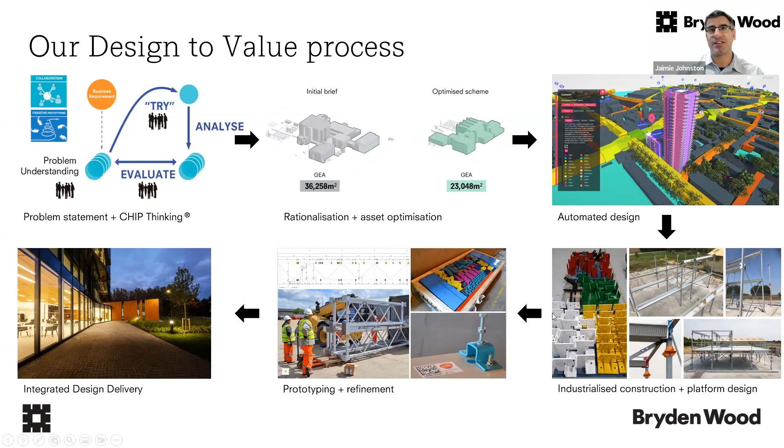So last week we talked about this kind of front end process. This week we're going to talk about these two bits, particularly automated design and industrialized construction. So this was the broad project life cycle we've talked about.

Data analytics, CHIP thinking we talked about. Reference design is where, for a lot of our serial clients now, what they want is a centralized, optimized design for a particular asset, be that data center, hospital, and then a way of adapting it and localizing it for specific sites and particular geographies. So that's a process we've been doing for quite a long time now.

Maria and her team have been working out how to really refine that process and start to dramatically increase the speed with which we can do that, and even open up wider the potential solution space that we're looking at.

So one of the things that hopefully came across last week is the process of CHIP thinking, particularly in the way that we aggregate business intelligence, the way that we aggregate knowledge from stakeholders and put it together, is increasingly giving us a data set to work with.

And lots of clients now have reams of data, but the gap between data versus information versus insight - there's a few steps there that people often find difficult to hurdle. So we've been increasingly working out how to leverage clients' data and do things with it to speed up the design process.

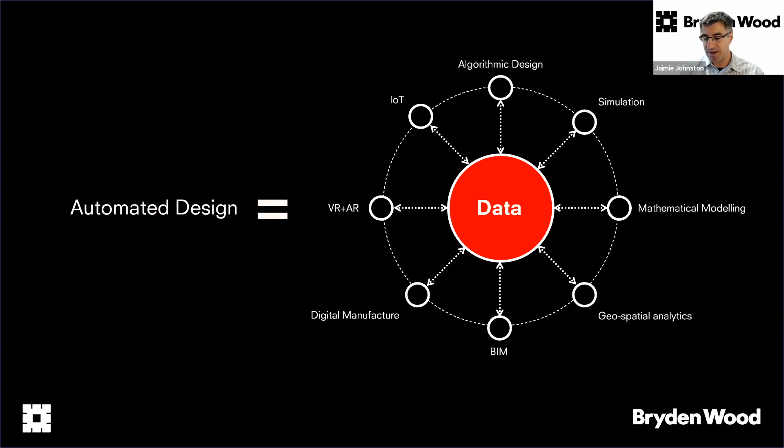So in our design to value space, one thing you could do is just automate a traditional design workflow and be much quicker. And for sure, that might be helpful.

Anyone who was tuned in last week will know that through design to value, we're not just looking to do things quicker, we're looking to do things better. So we'll actually use the speed from these automated workflows to test more ideas, consider more things, do more simulations. We're now using that speed not just to be faster, but also to find better, more highly targeted solutions.

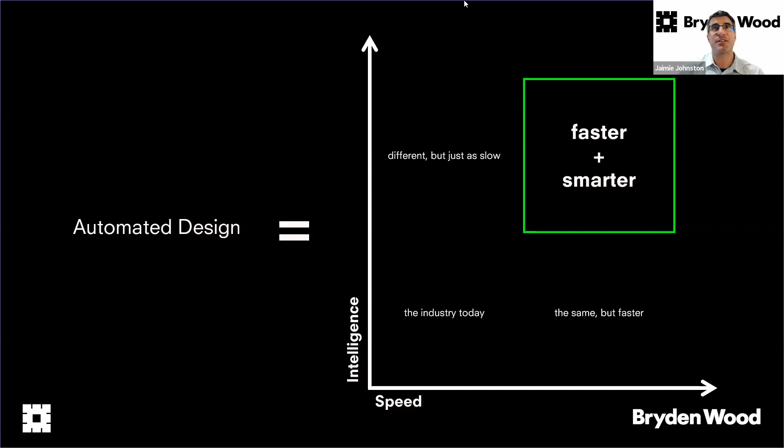So I'm going to hand over to Maria now, who's going to talk through what that really means for the creative tech team, how that team's evolved, and some of the best practice we've been starting to develop. So if I stop sharing now and hand over to you, Maria.

Thank you, Jaimie. So before I talk about the ways that we apply automation, I would like to introduce our team. In Creative Technologies team, our focus is on how we can apply automation in the industry, how we are interested in technologies, and we want to explore the capabilities that the technologies can offer.

We use the power of data, and we deliver software to our clients, but we are not software developers. So who we are: a group of architects and engineers, all specialized in different technologies. We are curious people that use our creativity on shaping the data, and we explore how the technology can make a meaningful impact in our industry.

So we developed, we structured our team throughout the years in a very careful way. And actually, as we increased as a team, we all had the voice and we shaped our team and our qualities together. And this is why - so we started back in 2017.

And in the 5 years that we exist as a team, only by year 4 did we manage to hire a software engineer.

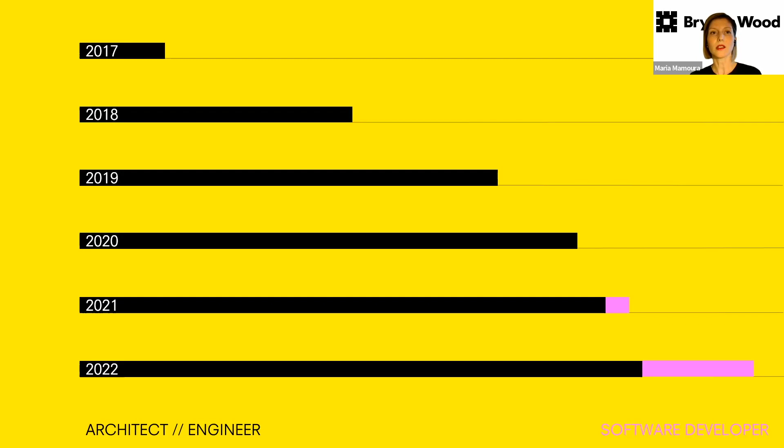Before we hired a person with a completely different background to us, we wanted to make sure we explore in a very critical way the technologies we want to use in our processes, the technologies that would help deliver the products we want to our clients. This is how we now have 5 software developers integrated in our team.

Across all projects and the whole team, we create clusters of people with different backgrounds, so software developers don't work on their own. We create different groups depending on project needs or our interest in different technologies, keeping a diverse shape across the team. We believe when we have many different voices coming from different cultures and backgrounds, this is the way to raise constructive discussions and debates, because we always need to question ourselves about which technologies to use and the best way to use them to deliver the right product.

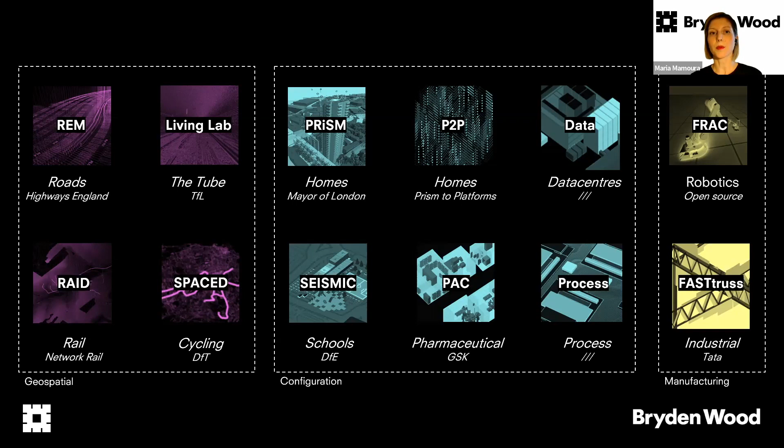As a team we've worked across many different digital projects - digital workflows, web applications, different configurators. Some of those focus on how to use geospatial information mainly. In other cases we develop platforms that allow us to explore different configurations of buildings, such as data centers, homes or schools. We also focus on projects that let us explore how to automate construction and apply design for manufacturing.

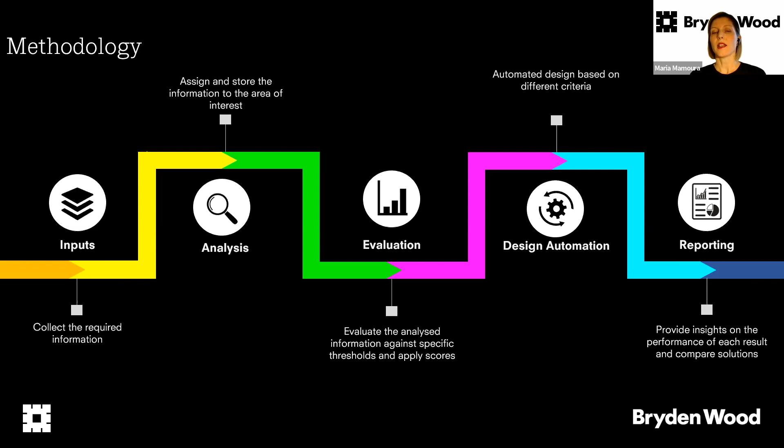Across all the different projects we work on as a team, we apply one common methodology in principle. The most challenging part of this methodology is how we can understand the needs of our clients and get the right context, translating it into a machine readable format.

It is very important that at any stage of any project we work on, we have constant communication with our clients, building a collaboration where we create a common vocabulary between the client and our team. We also translate the information we have in the right way so we can take it through the technologies we use.

It's very important for us that whatever we do in our processes, however we translate this information into a data set, we bring it back to a human readable format, and bring back the evidence of what we analyzed and what we developed as a team. Again, it's very important to have our clients engaged across the whole process of our work.

We want constant feedback from them, because whatever we do in between - which is the creative part for ourselves, where we test our methodologies, connect all the different technologies, and explore all the information we have - if we don't bring it back in the right format, then we'll just remain a black box for ourselves.

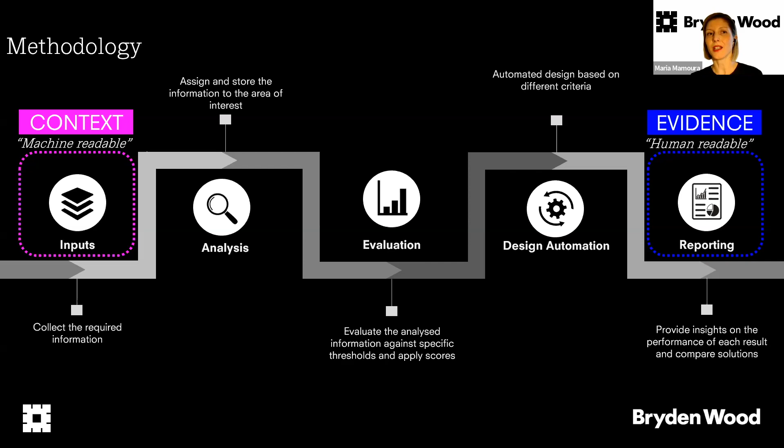So I would like to share with you a couple of projects that we developed as a team, by taking you through the journey of our team throughout the years.

As a team we've grown in confidence over the years. This started also when I joined Bryden Wood, when we weren't really aware of the capabilities we had back then and the impact we would have in the industry. But by having the right clients on the right side and grabbing the opportunities we had, we were quite ambitious and pushed our boundaries as a team, trying things we never used before in order to create a much more structured and confident team.

But we still have this curiosity, always asking ourselves: okay, how can we change the things we have already made, and what comes next for this industry?

In the first phase, which we call innocence, in terms of technologies we used whatever we had available back then. We used software familiar to architects and engineers, available add-ons to help us deliver what we wanted, and we were sharing data through file sharing.

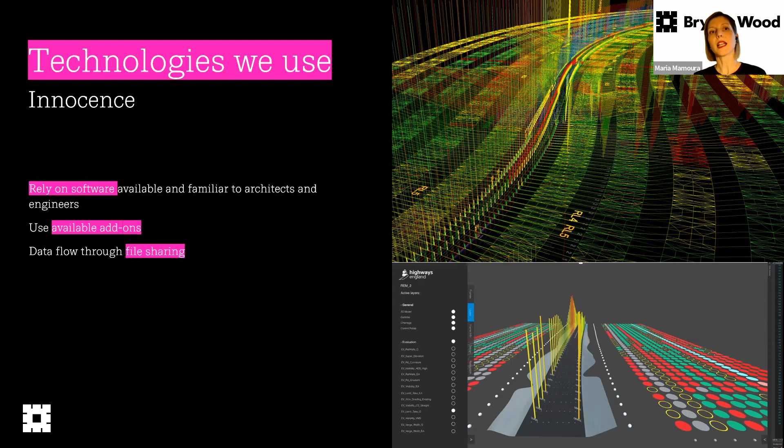I'd like to explain this process through the very first project we got as a team, the Rapid Engineering Model by National Highways. It's worth mentioning that the first requirement from National Highways was to create a BIM library with standardized components that they would use in construction.

That was a relatively easy task for us, because at Bryden Wood we always cared about how to standardize not only the process but also the assets. But we quickly identified that if we focused only on this part, we wouldn't radically change how the industry works, because National Highways also had the vision to innovate the way they work and change the workflows they use.

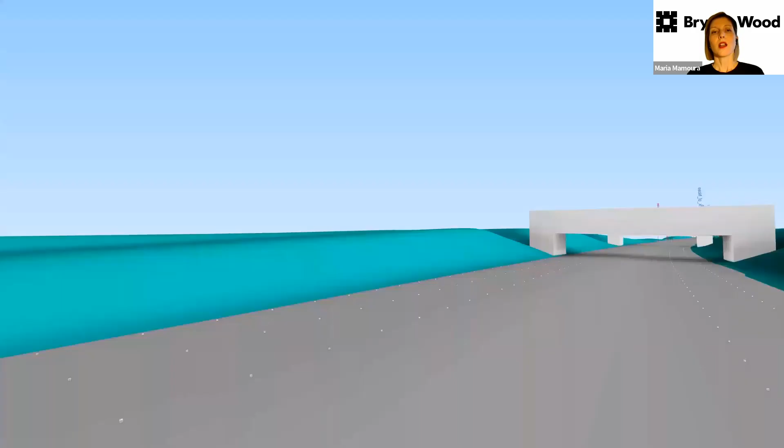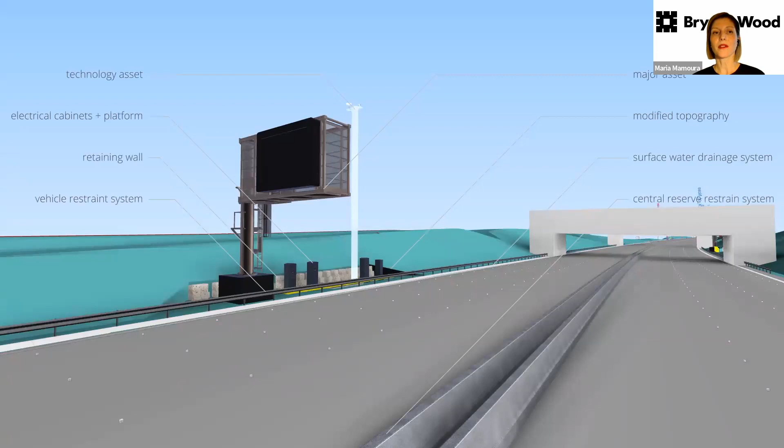We weren't that innocent back then to suggest a very big scope. We tried to identify small case studies from the very beginning of the design process, just to prove to our client that if we change a few things early in the design process, it could have a huge impact at the later stage of construction.

Through this collaboration, by proving what we had in mind and the impact it would have on the way they work, we created confidence between ourselves. So we managed to get a much bigger scope, where we were asked to create an automated workflow that would place all the assets required across the whole network of the country. This is what you see on your screen.

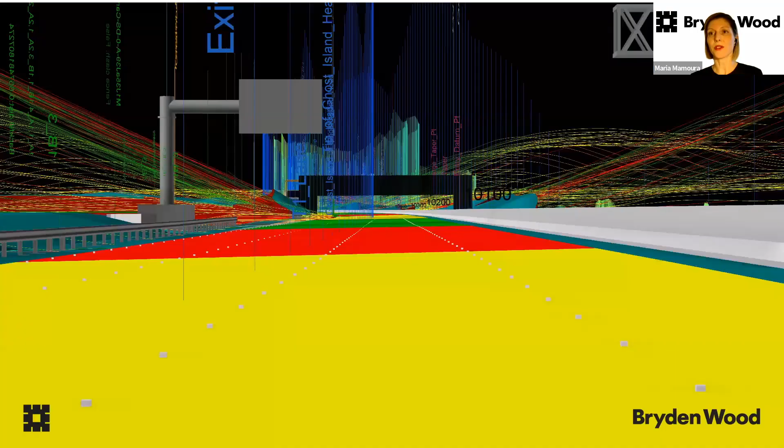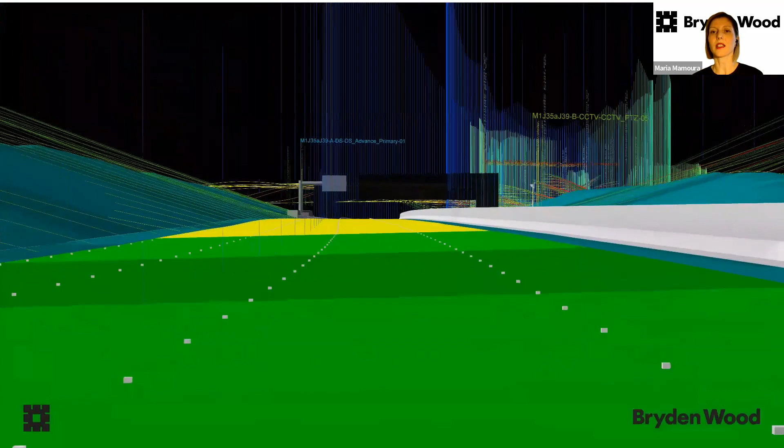Our focus was how we can translate the design guides we collect and the experience we got from the engineers involved in designing highways, and convert this information into a data set. We had to deal with lots of information, and we tried to depict that in different graphs to give back to the engineers and users of this workflow the conditions of the road they had to deliver a specific design for, in order to enhance their decision process.

It's worth mentioning an example about visibility conditions. First of all, as a team we aren't responsible for designing highways, and the experience those people have is incredible and super valuable. But what we did is provide them a tool with all the information they need available across the design stages.

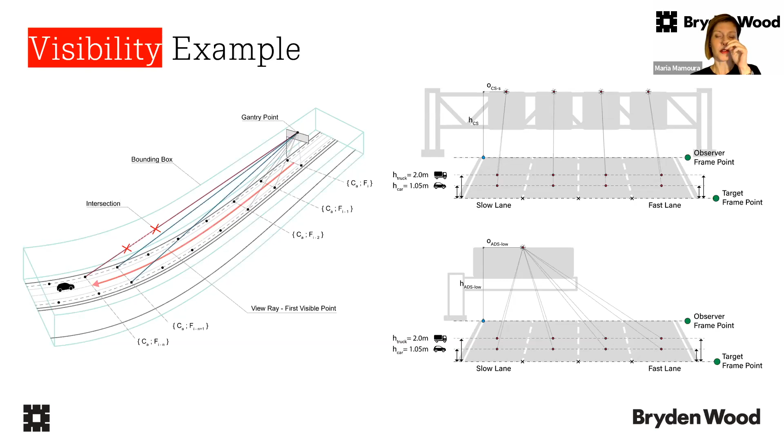For example, we could provide across the whole network, and at any location on the roads, through running many algorithmic processes, the visibility conditions of many different assets. That was a huge set of information, and our engineers using the workflow realized that having this information much more in advance in the design process could help them make much better decisions.

As we gained more experience as a team, we worked towards the phase of ambition, which was the more playful phase. In this case, we didn't rely on just the software we had available, but created platforms. We used available platforms and started customized processes to deliver platforms, tools, and applications for different users.

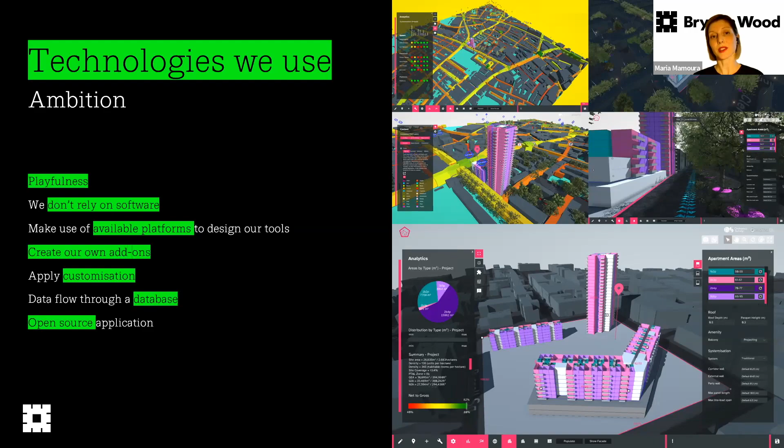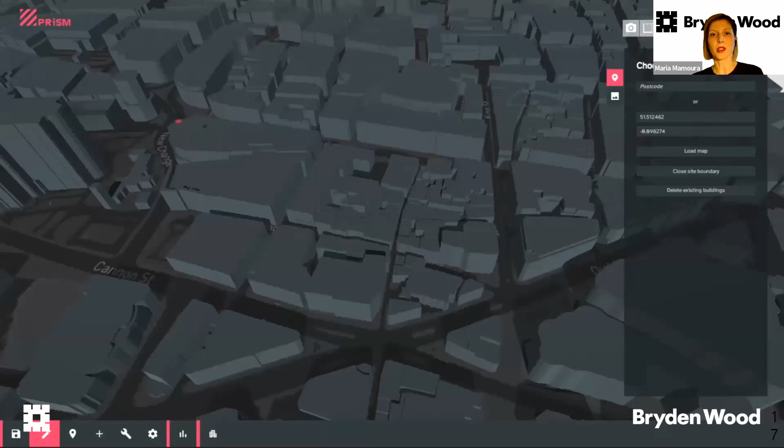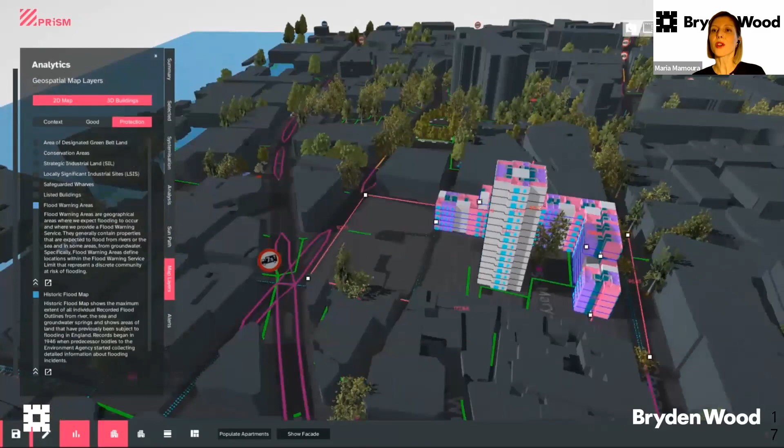An example of that is the Prism App project, delivered to the Mayor of London. What we wanted to do was create a platform that any architect, user, or developer could access. It's an open source platform through which we can explore feasibility studies across the City of London, where we capture all the local design guides, connected to a list of components based on a specific methodology for design for manufacturing, meaning we can explore what we can build on specific sites.

We can explore the data and information for the area, accessing information about green spaces, traffic, or bus stations. But more importantly, we can directly see the live report of the performance of the buildings, the list of components we'd need to build them, and any information to evaluate whether what we design is what we want to achieve, or how we can make our design better.

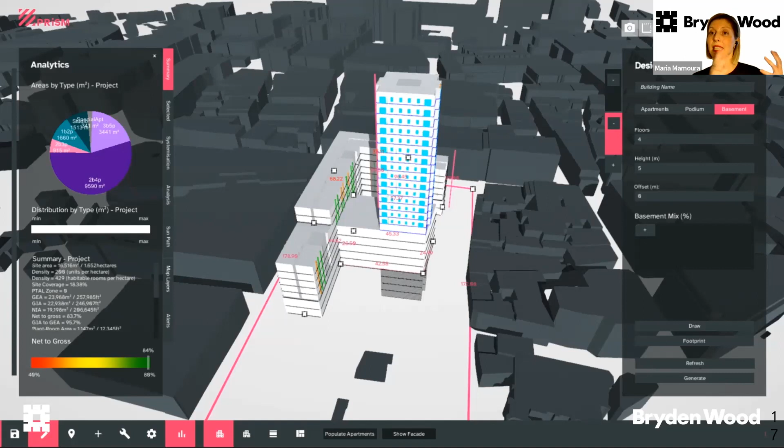It's worth mentioning that the rapid engineering model is an ongoing project, and through this phase we also challenged the way we initially structured the project. By gaining more knowledge from the PRISM app, we transferred this knowledge to other projects we worked on. It's very important for us to constantly challenge our past work. We don't want to reinvent the wheel, and we want to reuse the innovation applied in previous projects.

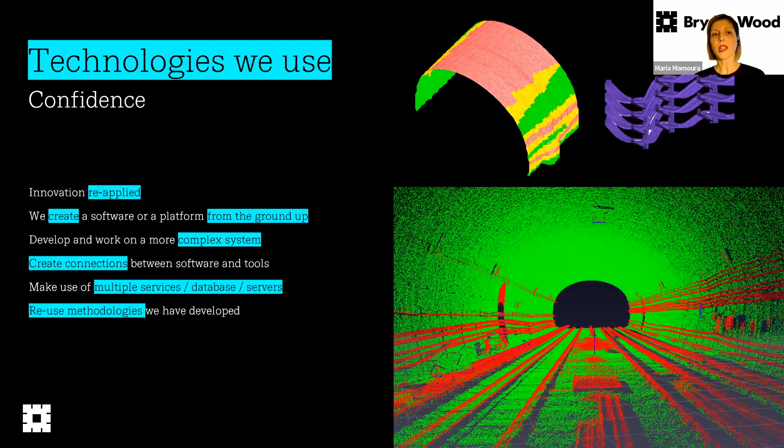And that takes us to where we are today, in what we could call the phase of confidence, where we create much more complex systems. We create connections between software and tools that allow us to apply much more complex algorithmic processes, analyze and run millions of iterations of design options, using multiple services, databases, and servers.

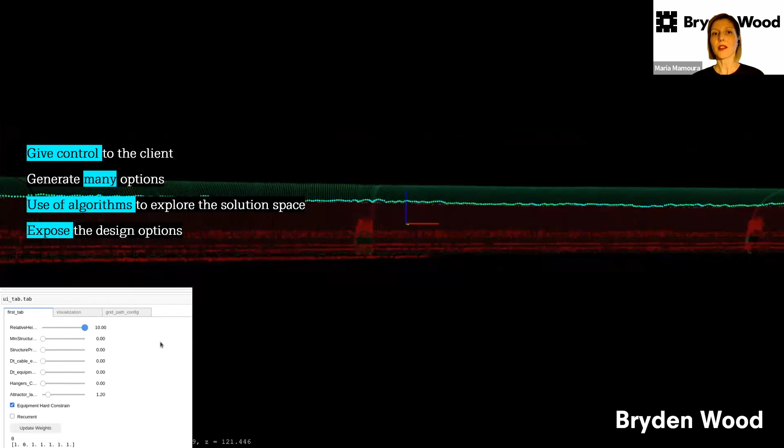So through that way, what we can give today is control to our clients, and we can expose the design solution space that we create. It's very important that by building communication with our clients, we provide the tool so they're able to explore their design solutions and improve the design on their own.

It's worth mentioning that what we don't want to create as a team is a black box again. We want to expose the process, expose the risks and challenges for any design option. We want to make our clients part of the design process. Automation wouldn't give one final solution, but it will give us the direction to improve the products we want to deliver.

I will hand over back to you, Jaimie.

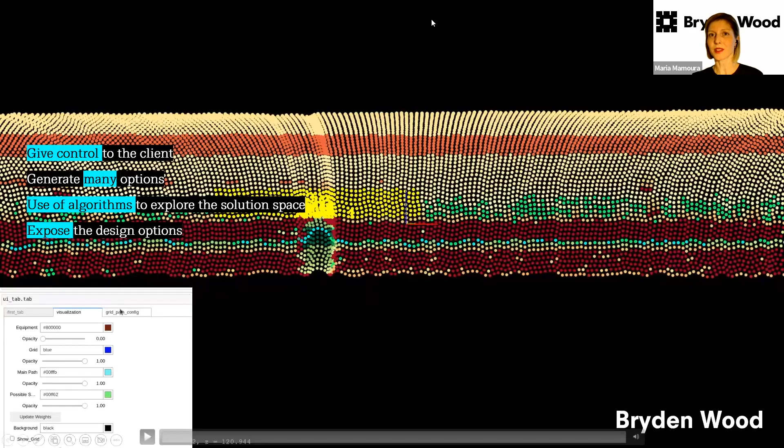Brilliant, thanks for that. Just to build on that final point Maria made, that for us is always an interesting thing we're trying to do through design to value - the idea that we've actually automated ourselves out of a job. For some of our clients, they actually run their own configurator, they do their own test fit designs. That's enormously powerful for a client who would normally have to procure a design team for every project.

So my favorite use case - one of our clients was saying that because they can use some of these tools, they'll do their own test fits, feasibility studies on a site. They can do that incredibly quickly, and they're becoming a preferred purchaser of sites because vendors know they'll get their design, due diligence, and permitting done in a fraction of the time a normal purchaser would. So they get into market much quicker because they can do a lot of testing very quickly up front.

So that is an enormous transformation in their internal capability. And again, designing our way out of a job feels a bit counterintuitive, but if you think through relentlessly adding value, that's where it takes you.

I think Maria didn't mention, but just to give you a sense of the potential time savings - the rapid engineering model, this ability for Maria's team to provide clients with a configurator they can use themselves, changes their internal capability. Again, that seems quite counterintuitive, to design our way out of a job, but if you're chasing value for clients, that's where it takes you.

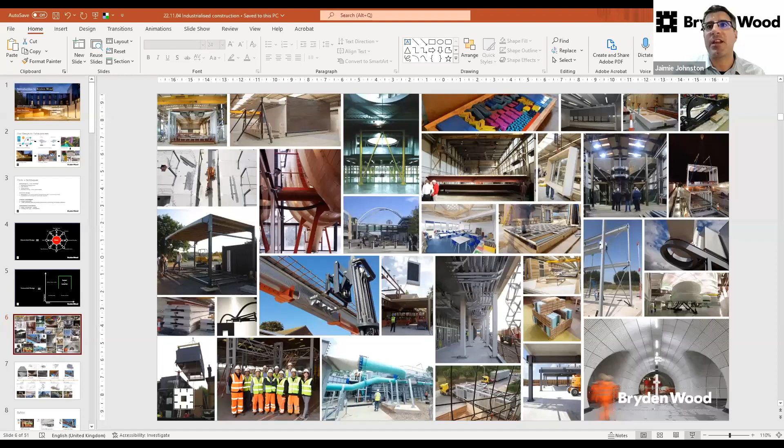So I'm now going to talk about the last topic, which is how that then translates into industrialized construction. I showed this slide last week - this is sort of going full circle, really. This is where we started as a practice, trying to work out how we could replicate some of the benefits of manufacturing, what that would look like in construction.

So we've developed lots and lots of different construction systems, more like manufacturing systems, for a whole range of clients in all the sectors that Margie talked about right at the top of this introduction. You can see here a whole range of solutions, from large volumetric, panelized, componentized solutions. We use a range of techniques and materials, and we draw down on this sort of palette as we work out what clients need. This is an alternative view of that - over a number of years now, you can see there's a whole range of solutions we've developed.

One thing we didn't used to use this terminology for, but you can see on this slide, is that we increasingly use kits of parts or components that can be configured in lots of different ways. Certainly in the UK, there's real interest in volumetric modular construction, which is making a building-size bit of building in a shed and bringing it to site - that's part of the spectrum of solutions.

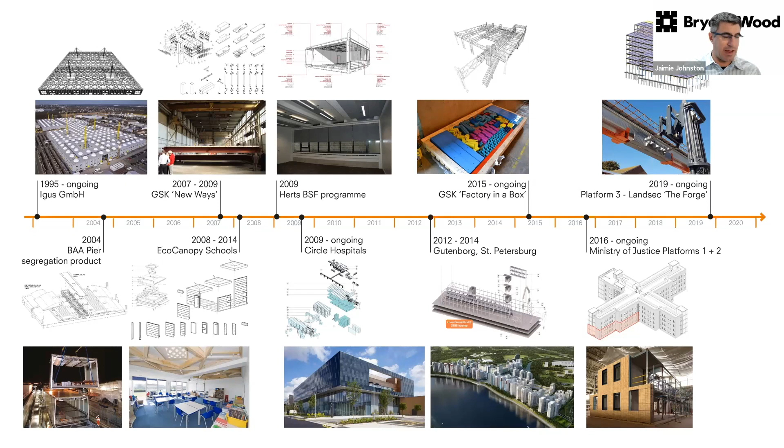So that's what we've been trying to crack over years - how to make sure we don't relinquish the quality of the building. If at any point you start to compromise the design of the building in service of the construction system, you've lost from a design-to-value point of view. We're trying to make sure we get clients the very best thing, so that's why we've started using more and more kit of parts solutions.

These are the sorts of metrics we've been able to achieve, just to give you a sense of the scale of benefits. Obviously safety - the industry is much better than it was, but that remains a big priority for us. By using fewer people and having them work in a much more controlled environment, we can dramatically reduce the potential for harm to people.

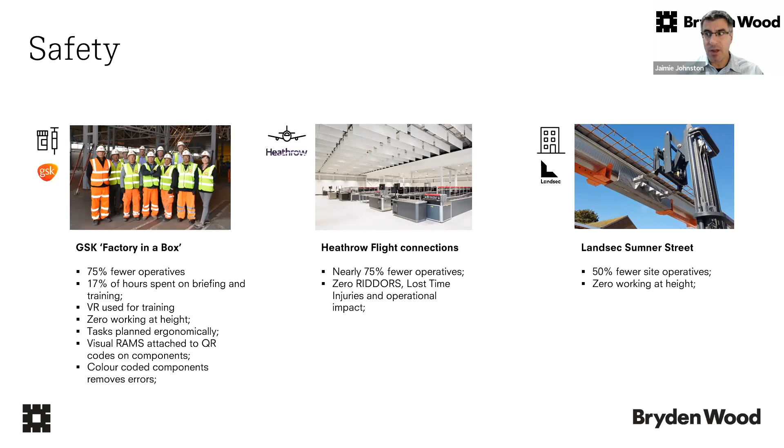That's massively powerful moving forward as we start to think about the skills gap and aging demographic, and how we diversify construction, making it more attractive. Safety has got to be a key thing for us.

We talked last week about why schedule is important to clients, and we're typically building things that are quicker but also cheaper and also safer. But speed has, as we talked about last week, lots of different impacts on clients - sometimes that's just speed of generating revenue, sometimes it's delaying the capital decision and allowing more time to let the design develop.

The top left of this actually was - I think John talked about this last week - a pharmaceutical project for a life-enhancing or life-extending drug. Every month we were quicker on this project, people didn't die, which on our value spectrum is an enormously big societal benefit.

So sometimes we're looking at speed helping clients generate revenue. In that instance, we were looking at speed saving people's lives, which is the sort of problem statement that we like to tackle.

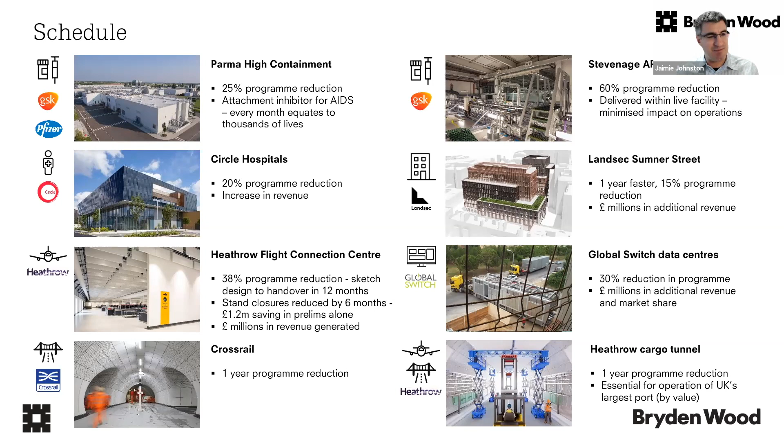Obviously cost is important, and you can see here we're not getting 2, 3, 5% cost savings - potentially we're getting sort of 20, 30, 40% cost reductions, whilst also being quicker.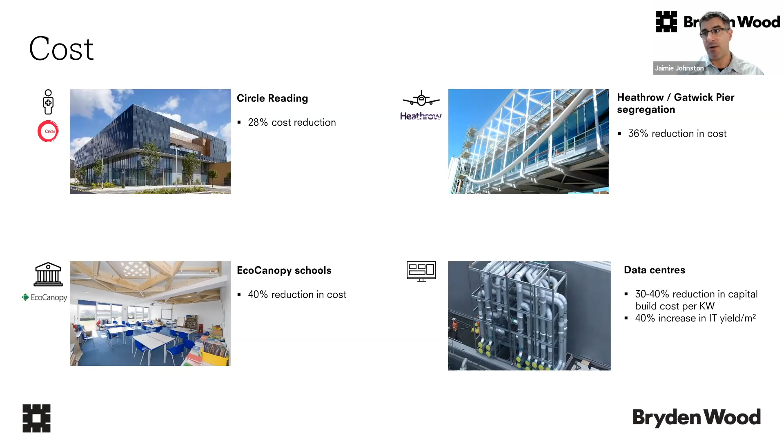We talked last time about how the time, cost, quality triangle in construction is fairly rigid. We often think that if you focused on, say, productivity, not only would you be working quicker, but you'd probably be working safer, you'd probably be saving money. So in our world, these things come together - you can get time, cost, and quality benefits simultaneously.

This is a really important one for us. Given the skills gap and demographic situation, we've had real interest in whether we can turn construction into tasks simple enough that non-construction operatives could do them. In automotive, it's not mechanics and engineers that make cars anymore - it's people who've been trained to assemble components in a particular way.

This has become really interesting to UK government, because the idea is that if you could turn construction into more simple operations, suddenly you can massively diversify the labour pool, and you start to see solutions to the skills gap and demographic issue, changing the nature of the construction workforce for the better.

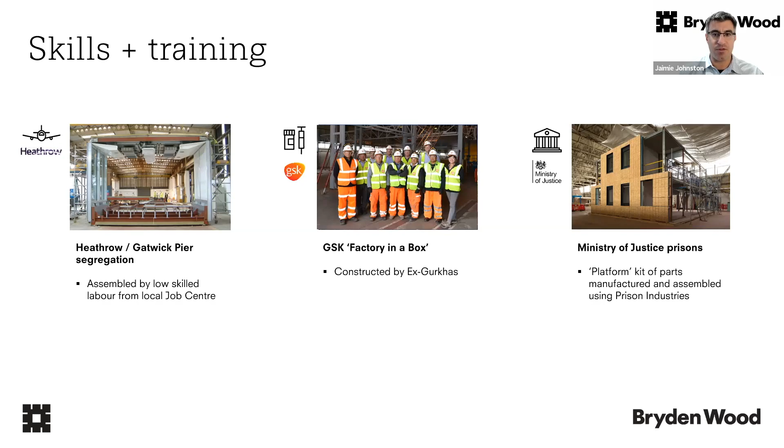So one thing I showed in those examples a few slides ago - typically for a long time we were developing specific solutions for particular clients. We were developing a particular solution for airports, or for pharmaceuticals, or for data centers.

That was going too slowly for us - we haven't got time to change the industry one client at a time. If you look at the numbers that manufacturing works at, no single client or even program of works has got the kind of persistent pipeline and numbers big enough to really shift the needle. So a number of years ago we noticed there was quite a lot of commonality between some of the systems we were developing, and started saying, well, if you didn't think in terms of projects or clients or programs or even sectors, you started thinking about platforms you could use across sectors. That might be an answer to how you start to shift these numbers.

I'm sure everyone's already familiar with the idea of a platform. The example I use is IKEA, because everyone's probably got some experience with it. When you go to IKEA, it doesn't matter whether you're making a bed or a wardrobe or a chest of drawers or a kitchen cabinet - whichever piece of furniture and whichever room it's in, the components are always the same, the book is always the same. You only ever need a hex key, maybe a screwdriver and a hammer. IKEA weren't the first, but they're the most successful at taking all furniture and boiling it down to a very small number of components, a small number of processes, and a small number of tools.

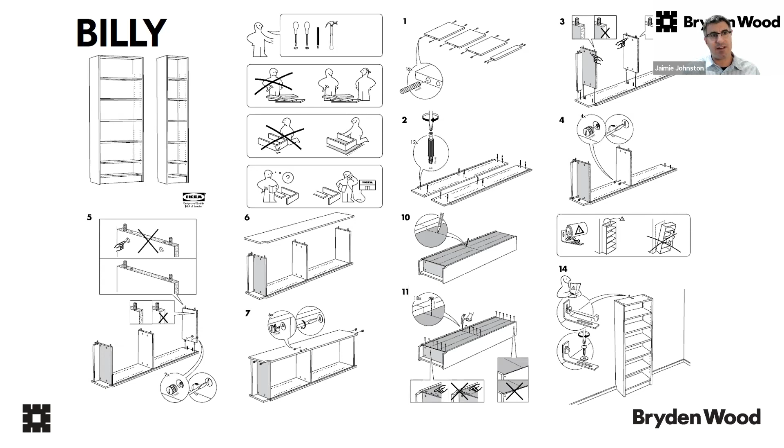So I touched on this project briefly last week. This actually started with the Ministry of Justice. We were brought in with the problem statement to develop a new type of prison that would foster rehabilitation. We very soon realized you can't really design a building that heals people - what you can do is design an environment that facilitates the right sorts of interactions and precludes the wrong sorts of interactions.

The value drivers we were really balancing were the need for a normalizing environment for prisoners versus the need for security and control. Bringing all those bits together, one output was a new type of prison that I talked about last week - we got rid of bars, changed the cohort size, got rid of the galleries, got rid of a lot of the archetypal things in prison, and developed a new sort of building block.

But the other thing we noticed was that we were starting to develop solutions common across a range of assets. Across the Ministry of Justice estate they have health, education, offices, libraries, visit halls, gymnasia and canteens. They've got house blocks as their biggest building type, but with all these other use cases we started saying, well, if we had an idea that was good for education for the Ministry of Justice, that's just good for education - we should propagate that more widely. So it started a conversation around how to more formally identify commonality and how to get these common solutions.

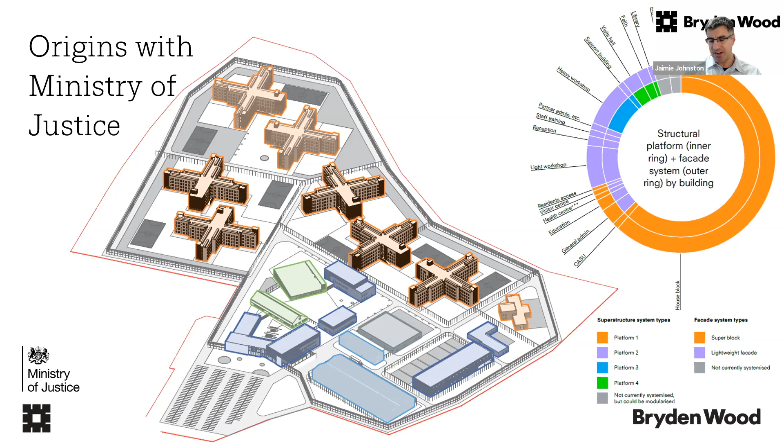One of the other things we were interested in was this idea of how to turn construction into simple processes. For one of the building types, we designed a type of facade literally made using very low cost materials and very simple processes. And we said to the Ministry of Justice, imagine if you could actually train prisoners to build the components.

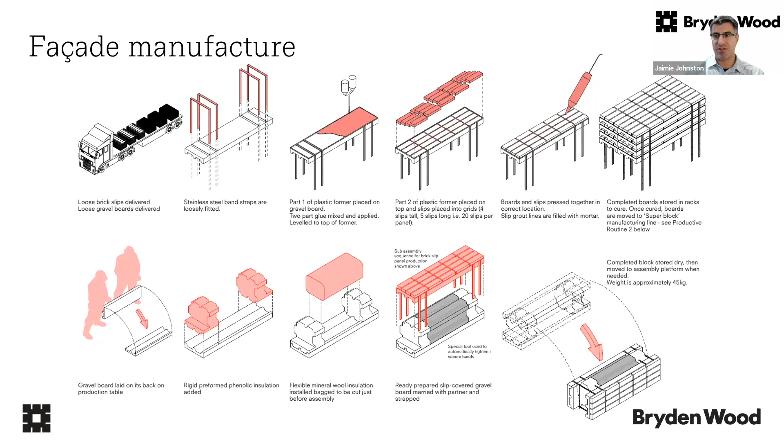The reason you do that is because if you can teach them manufacturing and warehousing and logistics skills, they'd be less likely to reoffend and more likely to find work. You could actually use the building of the prisons to kickstart the thing the prisons are there to do, which is rehabilitation. So even before the first prisons open, you could be helping rehabilitate prisoners through training and skills, which everyone really liked as an idea, to the extent MOJ actually gave us a prison.

The feedback we got from the prisoners was off the chart. They were really engaged, thinking about better ways to do things overnight. They were coming in the mornings with ideas around how to change some of the manufacturing processes. It was a real validation of this idea that you could suddenly start to really engage people in a different way of building.

So that started UK government particularly using this sort of language - this is language from the group called the Infrastructure Projects Authority. In the UK, they sit between Cabinet Office and Treasury, they own the budget for our big pipeline investment, and they set the policy and strategy. They're the central group that controls the way that social infrastructure is delivered in the UK. So this is their terminology.

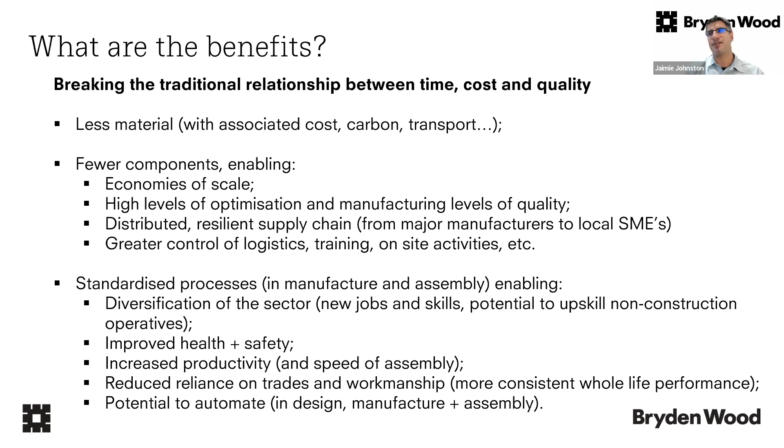So we started saying if you had a smaller number of components, you could really do that kind of manufacturing optimization. You could then start to boil down construction into IKEA-like assembly steps. You could diversify the workforce. So you get enormous benefits if you could get this principle to work, but you'd have to do it across sectors and at scale.

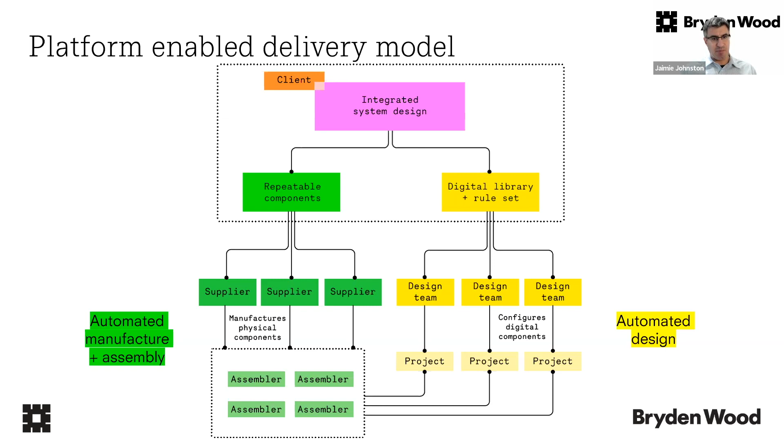So this was our vision for what a design deployment process might start to look like. We actually put a book out on this in 2017, off the back of the work we did with the Ministry of Justice.

We wrote the book saying here's what we've learned so far, here's our thinking, here's why you could develop a platform solution. We deliberately called it Delivery Platforms for Government Assets, because certainly in the UK, the only client with a big enough pipeline, long enough interest in the assets and ability to do this is the government. So if it had government backing, you could really get this to work, but it probably has to be government.

One of the very early diagrams we used to explain this principle was this one. We said, look, if you plot everything government buys, it all sits on this graph somewhere. If you focus on spaces, because when you buy schools, you're really buying education spaces. When you buy healthcare, you're really buying inpatient bedrooms and operating theatres to make patients better. So if you think about spaces, everything government buys lives on this graph.

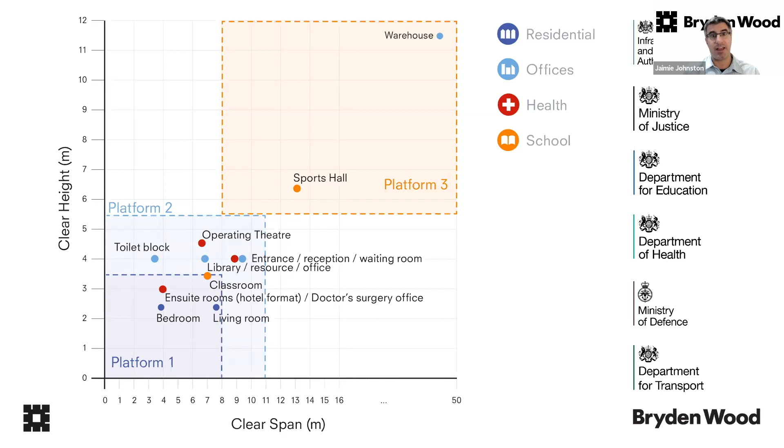You could imagine a kit of parts that does you big empty spaces, gymnasia, warehouses and things on the top right of that graph. You could also imagine a kit of parts that does the Ministry of Justice house blocks, single living accommodation for the army, and student accommodation - a sort of cellular repeatable accommodation kit of parts. Probably everything else lives in the middle, so a mid-span kit of parts would probably cover vast amounts of government spend. If you had that kit of parts, you could really start to change the dynamics.

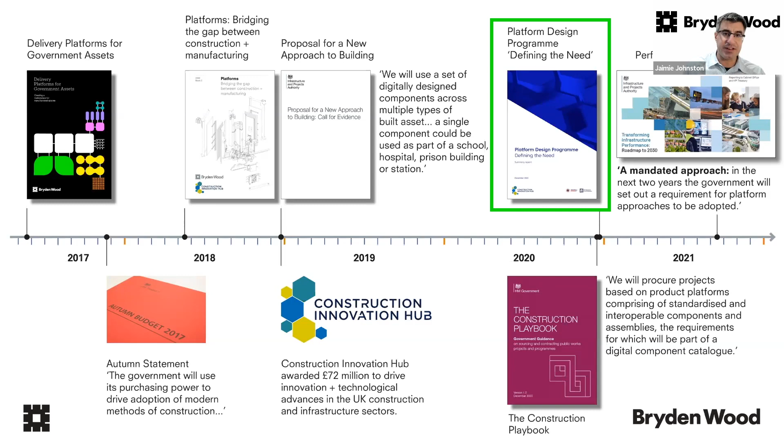Cut forward a few years, we were then actually allowed to do the exercise for real. There's a document here you can download for free. We were given 50 billion pounds worth of forward pipeline for these departments, put them all into a common data structure, which was a real challenge because no one had ever tried to do that before. Every department, every healthcare trust even has its own nomenclature, but we put it into Uniclass, so we had everything in a common data structure - data being the central pot we put things in - and we could then start to do analysis across all of the different assets.

If you download the report, you can see loads of different visualizations we did, looking for the degrees to which the technical performance and technical requirements were similar, and we found much more similarity, I think, than anyone expected.

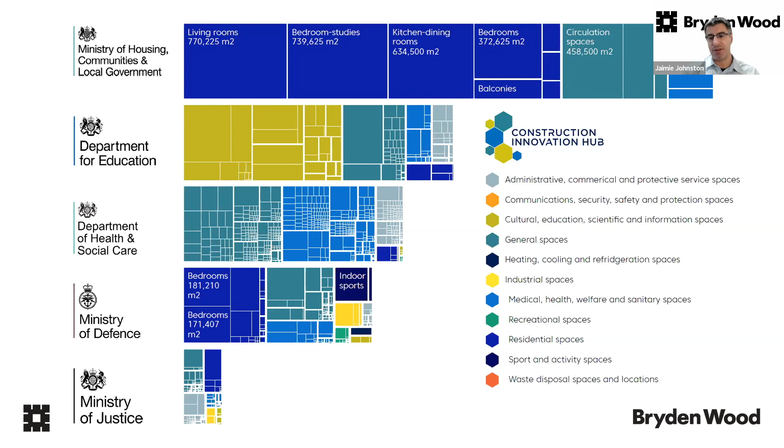Some of the things that popped out of this - top left, we sort of knew this intuitively, but we could now prove it. Of the 50 billion pounds we looked at, about 70% could all be built with the same superstructure system. So if you had this kit of parts, you could be doing it at enormous scale, and you can imagine how productive and how good you'd start to get at delivering this.

The top right slide also showed why it hasn't happened before. We found 104 different names for toilets across the government estate. So there's potential massive standardization, but it's hidden by the fact that everyone uses their own naming convention, for instance. Having the data allowed us to create these insights and really understand to what extent this might be achievable.

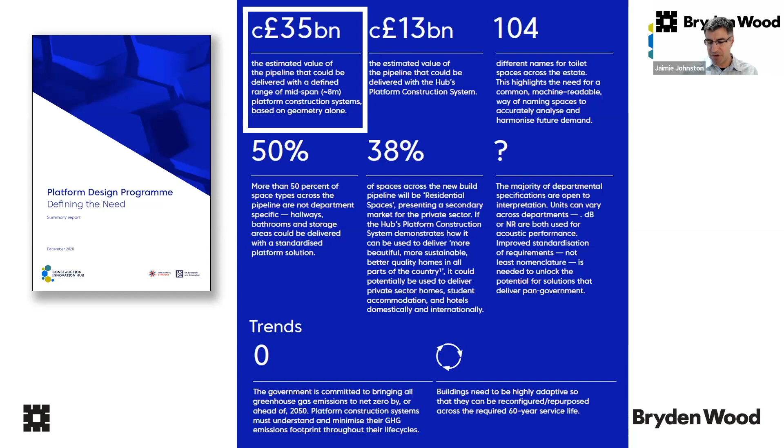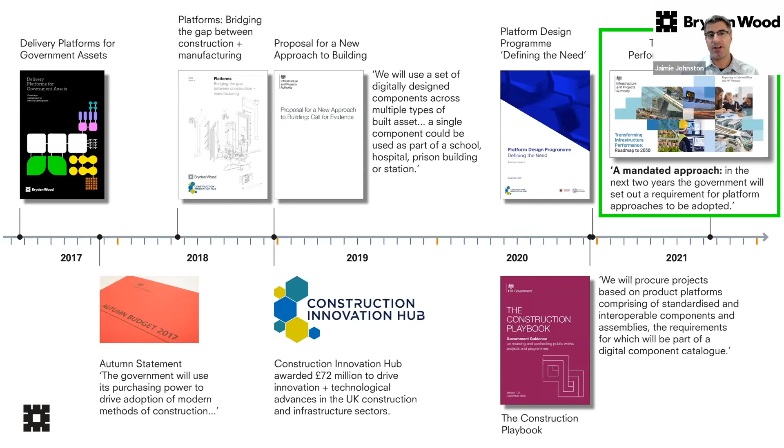Cut forward a couple of years, this has now become very, very prevalent in government thinking. The IPA put out a document at the end of '21 saying they plan to mandate this as an approach. So these are the sorts of benefits they're seeing.

Massive productivity gains you can imagine by deploying kits of parts at scale, disaggregated supply chains allowing anyone to make these components, leveraging existing supply chains to make these bits at scale. Suddenly you start to get a very distributed, resilient supply chain. Factory conditions on site we're going to talk about - this idea of not necessarily moving things into off-site facilities, but changing sites into something more like a manufacturing facility would be even more powerful.

And configuration tools, you can see from Maria's talk why that's important now.

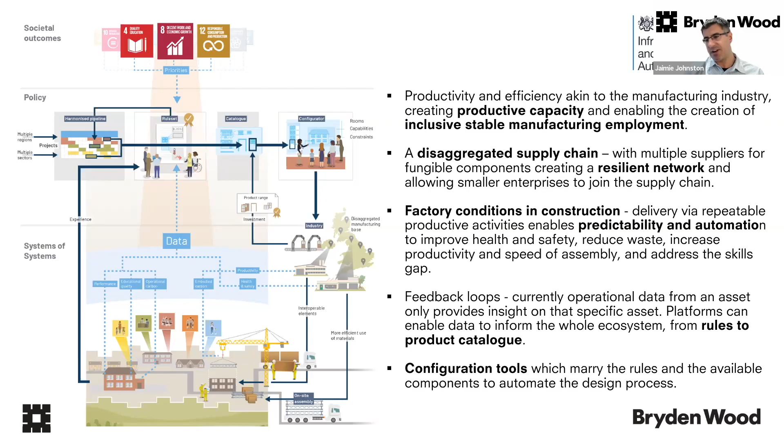For the last couple of minutes, I'll take you through an example of a project actually using these kits of parts. This is an office building we're doing for a company called Landsec, the UK's biggest private developer. There's something interesting about an idea we first proved and tested with the public sector—the private sector very quickly picked up on it and said, yeah, I can see the benefit, I'd like to deploy that myself.

This project, if you know London, sits between St Paul's—St Paul's is just across the river from it, the Tate is on one side, the Shard is on the other. So a very prominent site with some very important stakeholders.

Architecturally, we've had to design something very site specific. Given all the constraints in that part of London, we had to design a super site-specific response. You can see it doesn't look like a boxy building because it's a kit of parts, but it massively leverages a kit of parts.

We've broadly thought in terms of structure, facade, fit-out, and MEP. Structure sits in the middle of this diagram, not because it's the biggest bit of anyone's cost plan, but because if you can nail the superstructure, it's an enabler of all the other things.

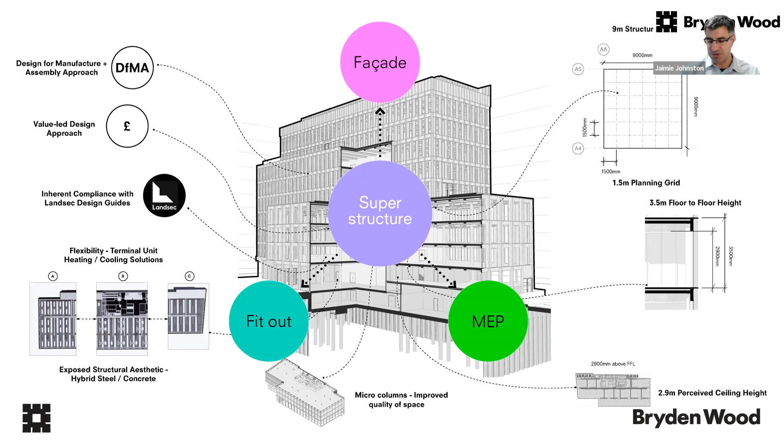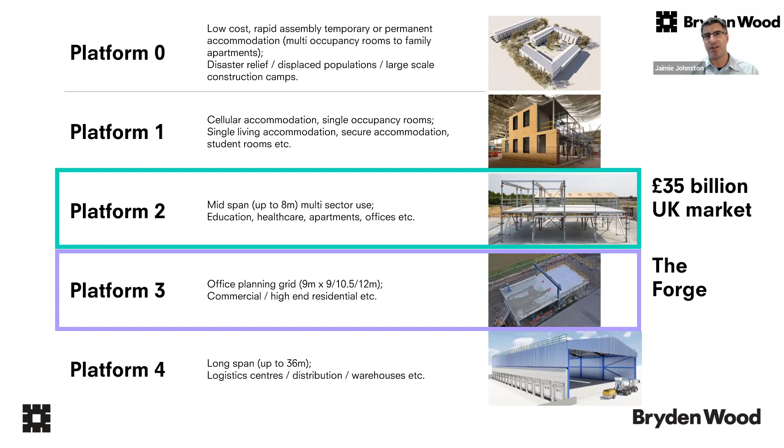That diagram I showed earlier, with the graph showing the spread of platform types—we've now got a number of these. We use the numbers simply to denote the spanning characteristics. Platform 2 is our mid-span platform, the one that 70% of government assets could use. Platform 3, we've added one component to get bigger spans—9 by 9 meter grids for commercial office.

But the platforms tend to use, again like IKEA, lots of the same things—whether it's a methodology like automated design, a physical component, or a process like color coding to identify components, we mix and match these. Once we've found or learned something in, say, commercial office, we can instantly deploy it in healthcare or education. Because we're using the same kit of parts across multiple sectors, they're all moving quickly, and learning from one area instantly gets deployed in the others.

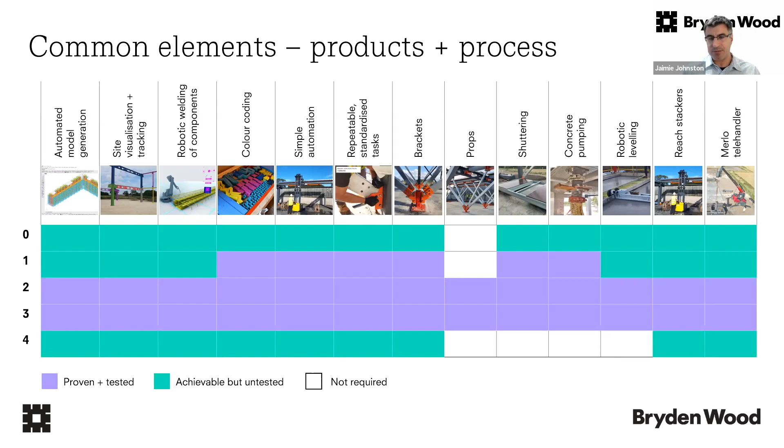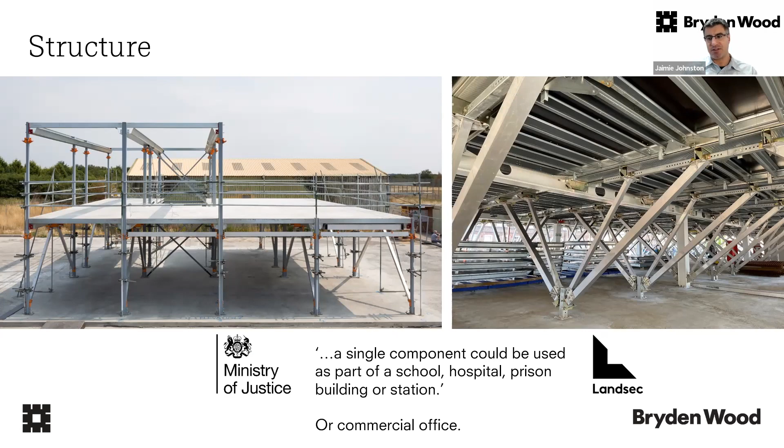Because we had a kit of parts, this was one of the projects where we didn't model the building—we auto-generated the model. You plug in some key parameters, it creates a data set that describes the position and orientation of all the components. From that data set we generate the BIM model, but we can also do the procurement and fabrication.

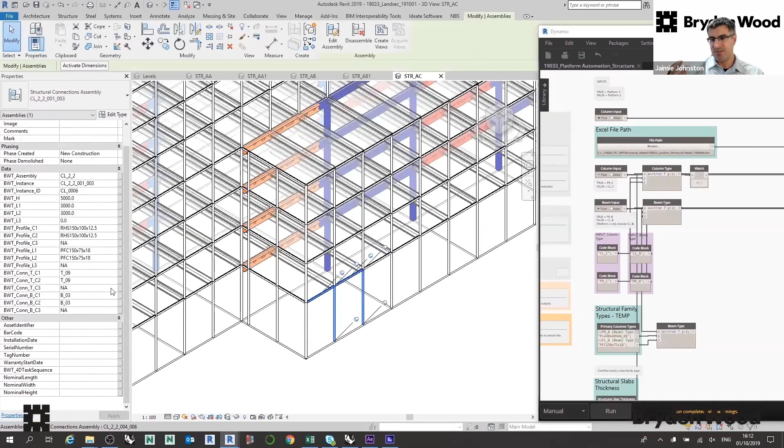Every time there was a change on this project, we didn't update the model, we just generated a new one, because it was quicker to do that—it took seconds. So we get very high quality information, and we remove the potential for humans to break the rules. We're leveraging the kind of stuff that Maria's team does to get and manage a much better data set.

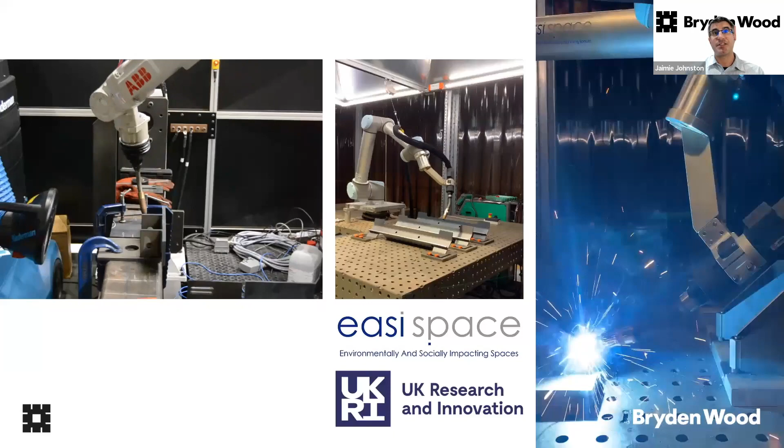For some of the components, we don't need to draw them at all—the file goes straight from us to a supplier. We're now getting into the space where we can take an auto-generated model, and the file for a particular component goes straight to a robot. Again, much quicker, much more productive, and much more accurate.

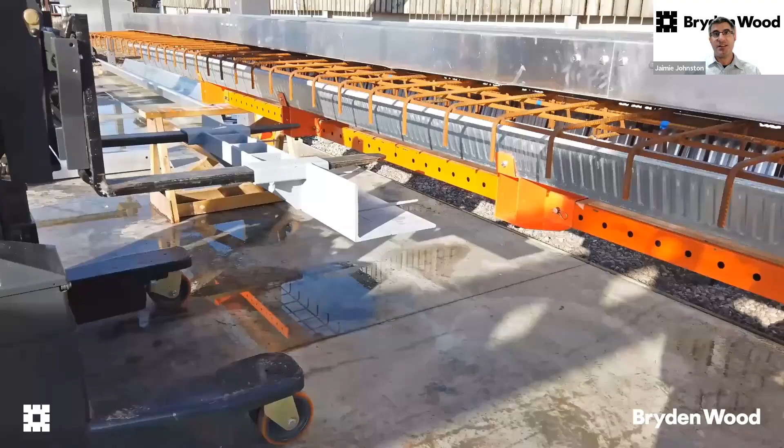So the thing that arrives on site will be exactly what we modeled, because the robot doesn't interpret things and get things wrong. And then this was our prototype.

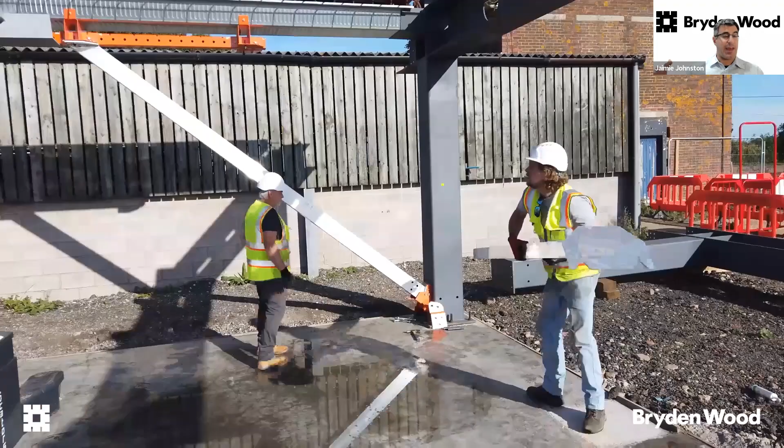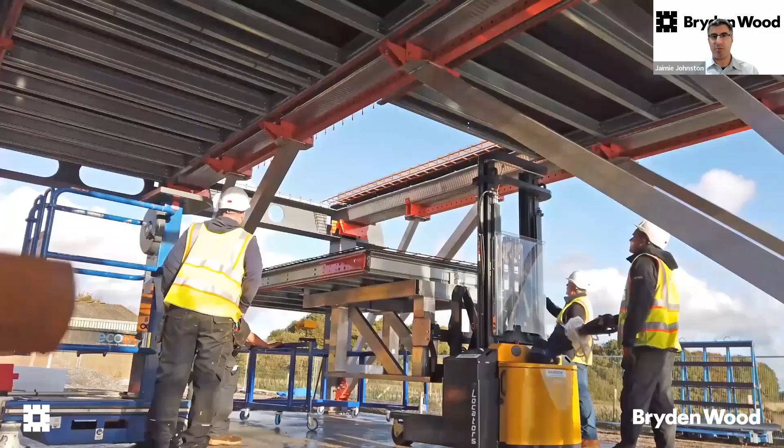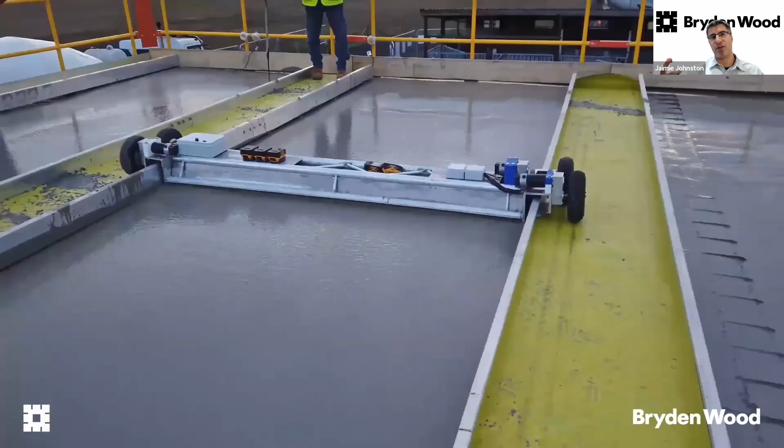We were looking at what level of automation was appropriate on site. So this was looking at, could we build the entirety of a superstructure without ever working at height? You can see here very simple tasks, color-coded components. We're measuring things in minutes, and a very small team of people can build a superstructure without ever needing to stand on it. Everything's lifted from below, the concrete's pumped from below, the little robot can level it. All of the fixing points for the MEP are already installed, and it's super accurate. On 9 by 9 meter bays, we were plus or minus 5 millimeters, which means that everything else fits as a kit of parts.

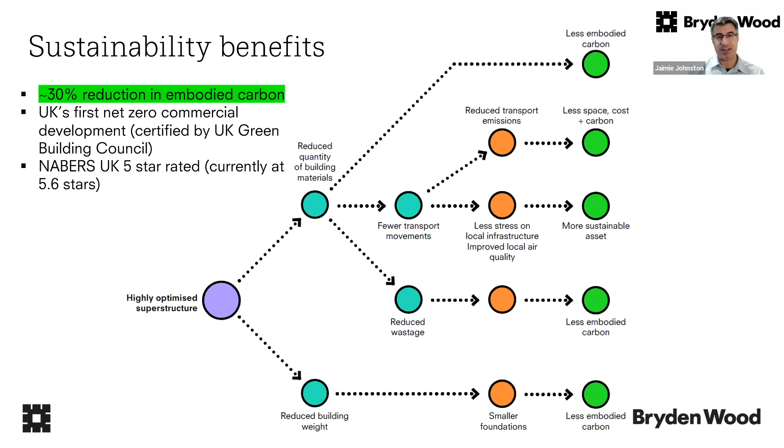One benefit of that was it was much more carbon efficient. We took about 30% of the embodied carbon out of this project. Obviously virtually zero waste on site, better control of vehicle movement. So all of these things contributed to this being UK's first net zero commercial building.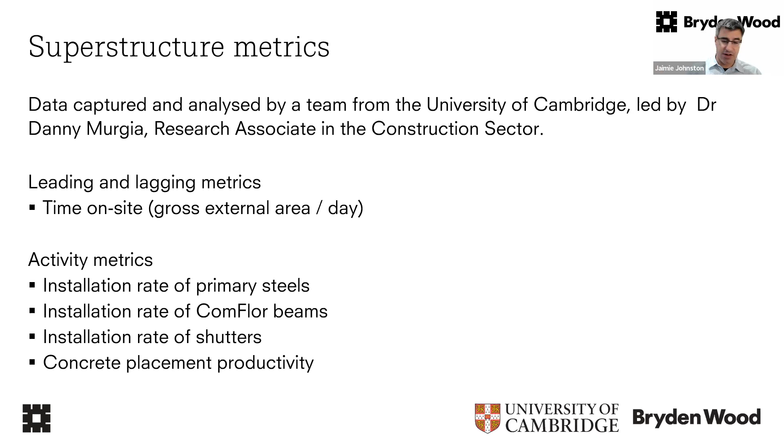We also had a team from University of Cambridge crawling all over this building to get a load of metrics, which normally aren't worth gathering because every building's bespoke. But when you're developing a kit of parts, anything you can learn from this project has massive power, because you can then feed it back into the next generation of components. So we had a team of PhDs observing everything on site, looking at the site records, looking at the as-built records and things, and they found some really interesting things.

One thing they found was that variability is massively important in these projects. It shows that it was possible to put 12 bits of steel up in a day, but on lots of days they didn't do any. What it showed was that if you'd just been consistent, not quicker, but just consistent, you would have been 25% faster, which is really important to know.

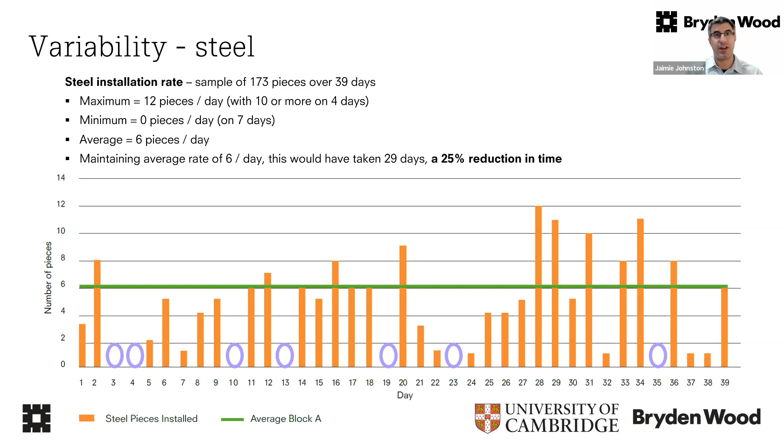It showed that there were all these downtimes where activities weren't happening. So this is teaching us how to plan the next phase of these projects, where we won't have Gantt charts, for instance. We'll look in terms of piece count and say, just put up 6 bits of steel every day.

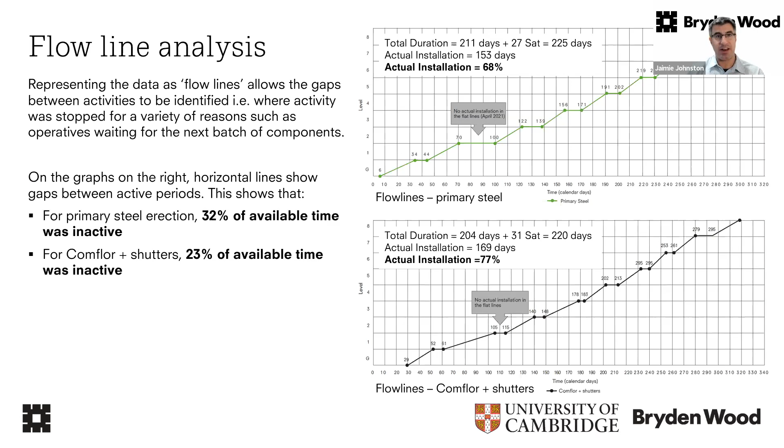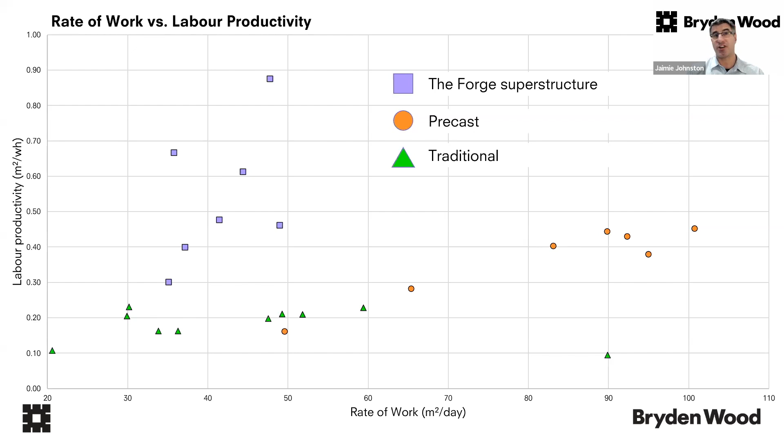This was really important. It showed that the system was about twice as productive as precast, for instance. Precast is very quick, but even on the first project, even with the learning curve, we were very, very productive. We were nearly twice as productive maybe as traditional construction, which again, given the McKinsey graphs you've all seen with flatline productivity, that's massively powerful.

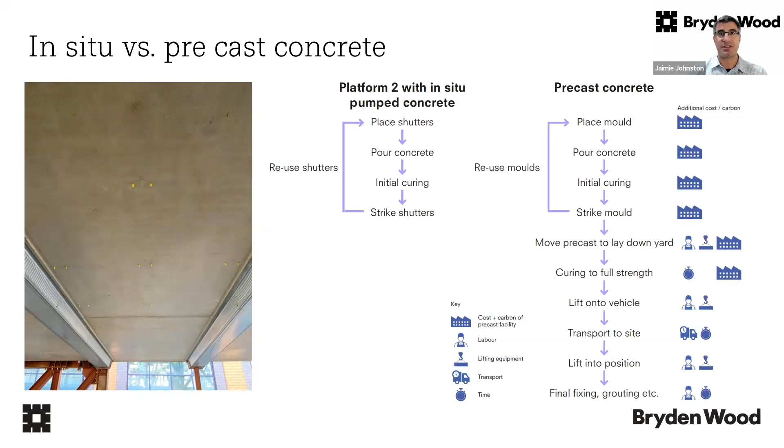Without also introducing all the kind of time and cost with precast, we were getting precast quality finish on the left-hand side, but without the downtime and the lifting and the moving and all the additional steps that precast takes. So we're currently about twice as productive as precast, slower but much more productive. You can see here, without all the non-value adding and carbon introducing steps. So again, it tells us we're onto something quite powerful with this.

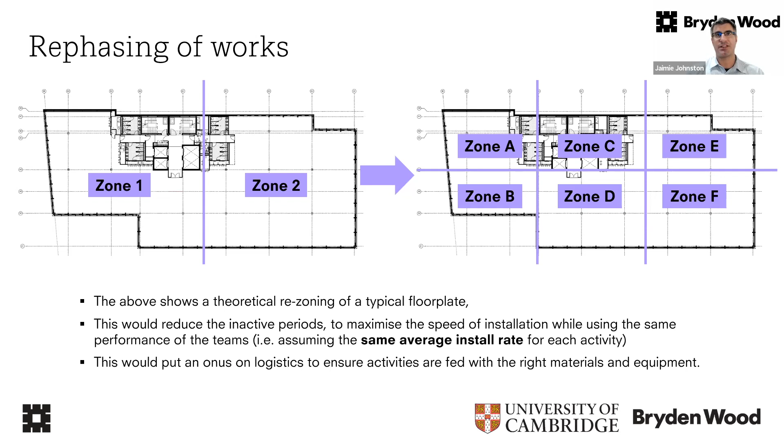The University of Cambridge team also did studies where they said if you didn't go any faster, but you resequenced things to take out all those non-productive periods - don't go faster, but organize things to be much more consistent - you could potentially take 40% off the program. So we've already got a system which is demonstrating you can be twice as productive and probably build things in half the time. This would address the kind of time difference between this and precast. That is gold dust, because we now know we've got a system we could deploy at scale, which dramatically increases productivity, massively increases quality, and potentially could be built much, much quicker.

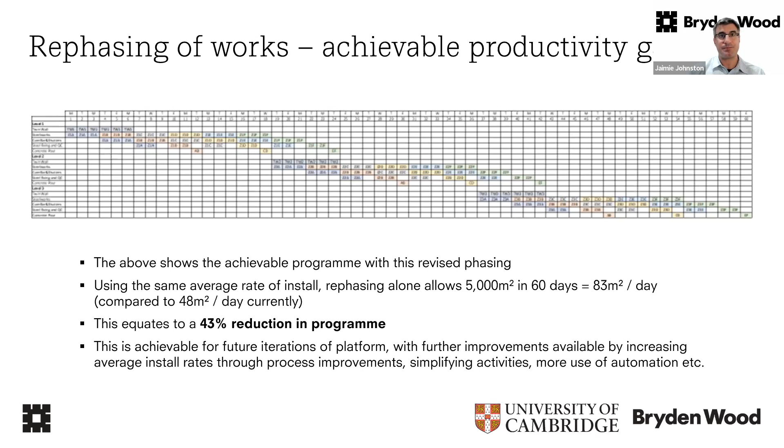The facade wasn't unusual, it was a fairly normal facade, but because of all the pre-work we'd done, it went up lightning fast. They'd planned to do 7 facade panels in a day, so 1 an hour. At peak, they were putting them in every 7.5 minutes. So theoretically, you could have clad this building in a week, not because of anything unusual in the facade, but because the superstructure was designed to be ready for the facade to be quickly installed.

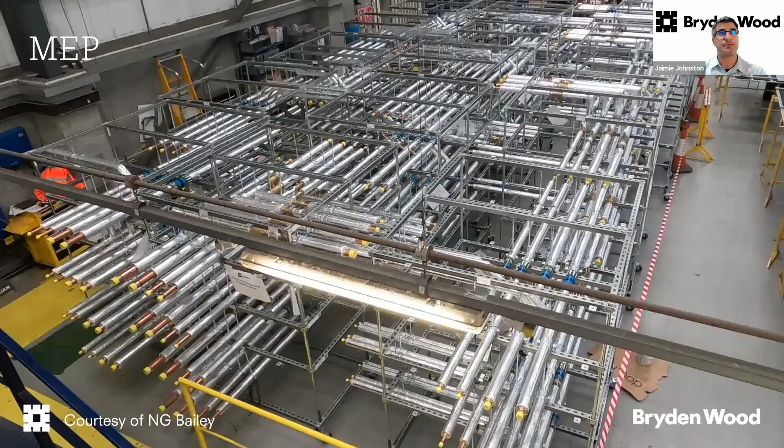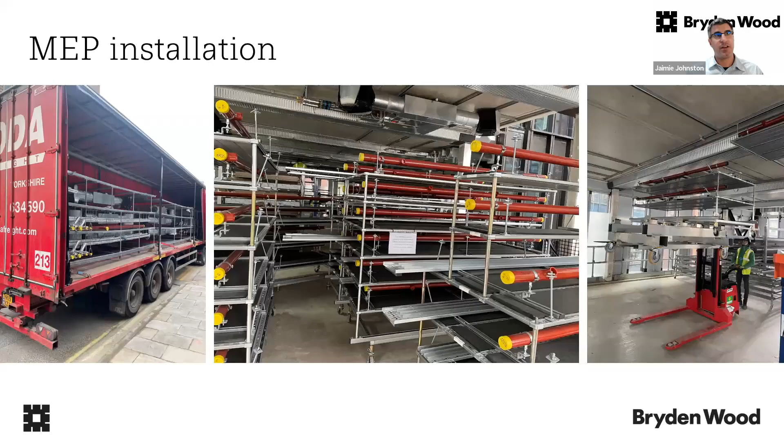And the same thing on the MEP, because we'd pre-designed all the fixing points. NG Bailey, who were the contractor, set up their factory with bays, benchtop things set up, dropped the MEP in, wheeled that off the floor into a truck onto the floor plate, and then used a specially adapted forklift to pick up all of those cassettes in one hit, staple them to the ceiling, move on, staple them to the ceiling.

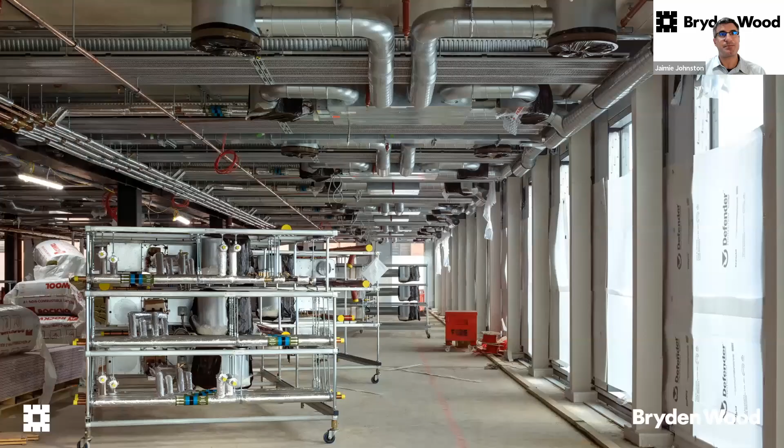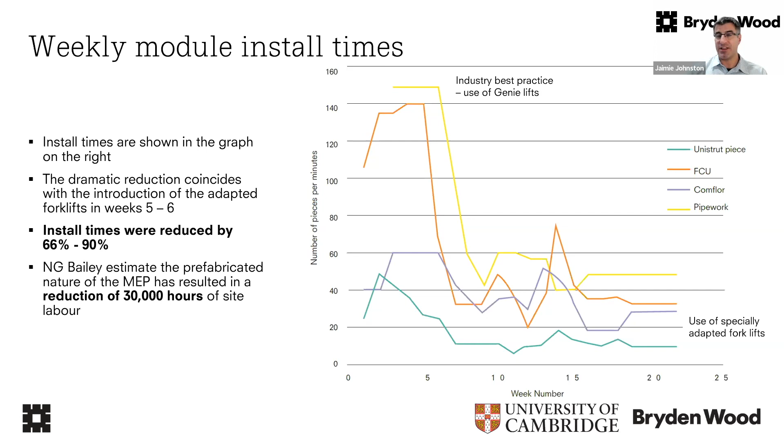So a single operative could do massive amounts of MEP in a single day. Looks amazing. You can see the numbers—left hand side is industry best practice, right hand side, once they got the hang of using that little bit of automation, the install time has absolutely plummeted. So again, we're demonstrating that you could be much, much quicker, much more productive using these sorts of techniques.

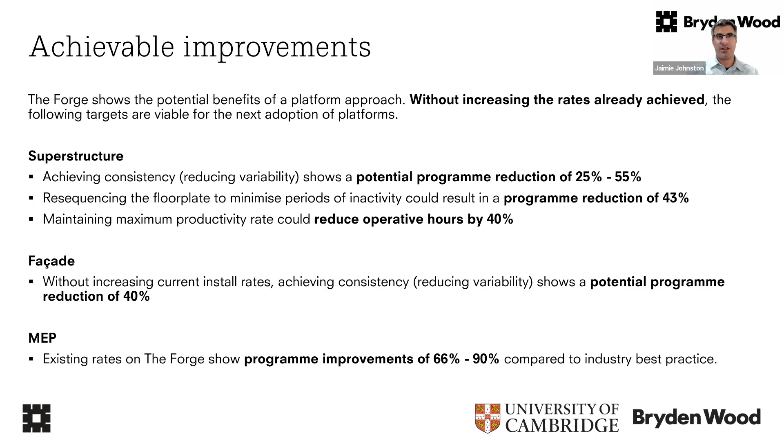So this was my last slide. You can see here again, without going any quicker than we're already going, you could potentially have built that building 40% quicker. So if you imagine taking that learning, moving it forward, multiplying it by the scale potentially of UK public sector—as I say, not the finished article yet, but we're definitely onto something. Hopefully this shows that there's some techniques here which are really demonstrating how we could dramatically change time, cost, quality, carbon at scale across construction.

Apologies, that went on longer than I expected to. Sorry, Margie, but it was worth going through some of that. The whole audience was completely rapt, so no problem about that.

First, I just want to say, wow! Every time I talk with you, I'm so astonished at the thinking behind this and what you've been able to achieve. And I guess my question to you is, as you think about coming to the United States with this idea and this experience, where do you see the opportunities most likely here?

Well, there's nothing in what I've shown which is UK specific. There's nothing we've shown which is anything to do with the UK industry—we're trying to solve problems which are prevalent across the whole industry. The interest we're getting is particularly from big serial owners who have a rollout of things and want to move quickly and get to market quickly. So data centers particularly, and we see healthcare as something we've got lots of experience in, a sector where we can add value.

I think residential—we've talked about last week—we failed to crack in the UK. But the reason I wanted to show the Prism thing was to say, look, we've got some thoughts around resi. That seems to be a topic globally that we could address. So I think it's going to be a mix of those high value, fast moving sectors—data, health, other social infrastructure, housing—and virtually everything in between is probably up for grabs. But as I say, nothing that I've shown is UK centric. The idea is that all of it could be propagated very widely, and is totally applicable for the challenges in the US.